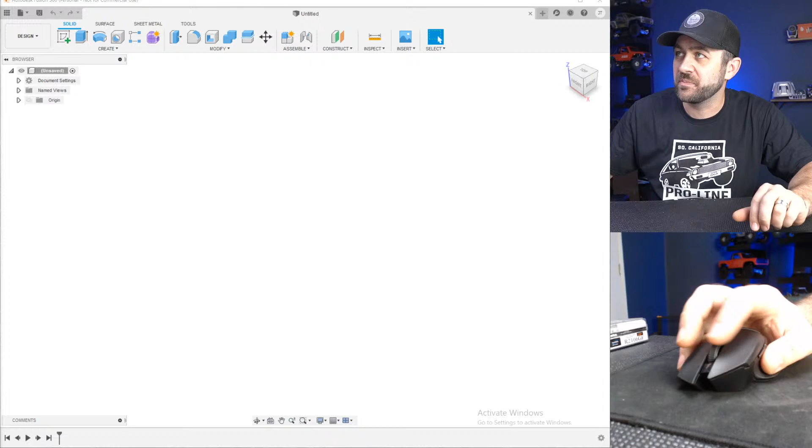Again, we're going to be using Fusion 360. I'm going to switch to that view now. I guess my other camera is just giving you a real good view of my shirt. This secondary camera is almost pointless, but it's just to fill dead space on the screen, so that's why you get that. Anyway, Fusion 360, the reason we use this is you can download it for free and get a free license for it. It's a little difficult to navigate your way there, they don't do a good job of putting it out there exactly how easy it is to get everything for free, but nonetheless it is possible, at least in the US.

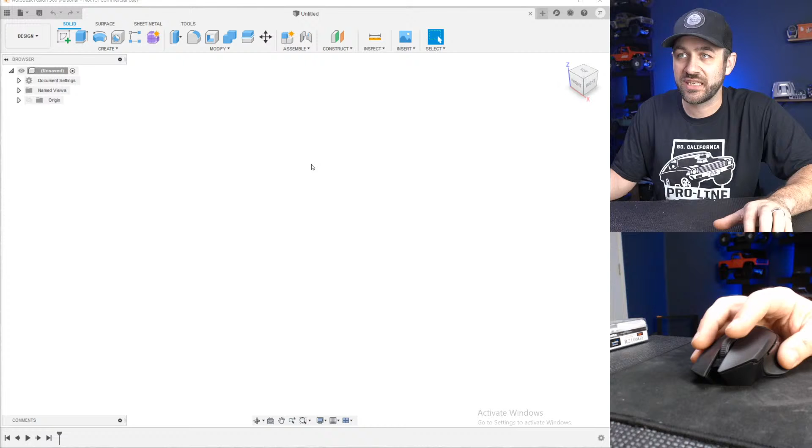So this is Fusion 360. Once you install it and open it up for the first time after registration or creating an account, this is what you'll see. We'll kind of go through general what you're seeing on screen before we jump into a very simple project tonight. Up at the top you'll see the typical menu bar, something you're probably used to seeing in most applications. The first thing here is the design menu, and if you drop that down there's a number of other areas, things that are more in-depth. Design is where you'll spend your time creating a new solid you've never done before. Generative design is taking and simulating forces, and it will create something on its own - kind of cool, but much more advanced.

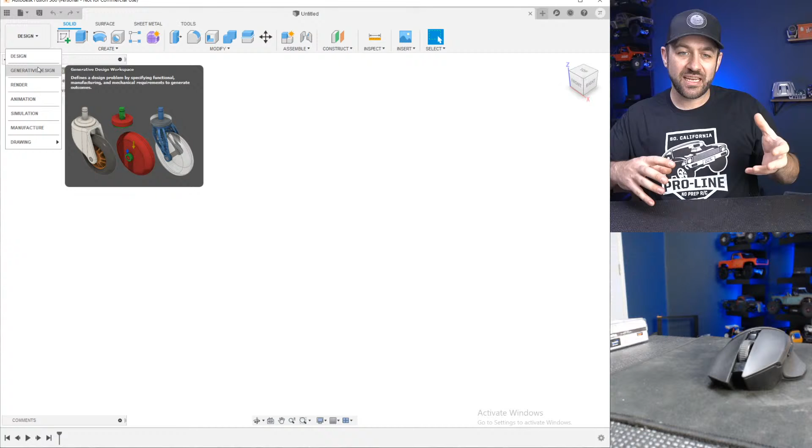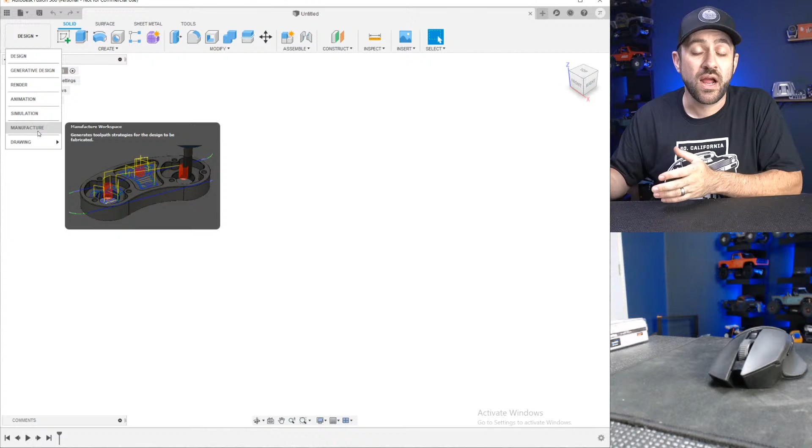Render takes a model you already have and tries to put photorealistic textures on it to make it look like a real picture. Animation is exactly like it sounds - you take something you've already drawn and animate motion of some sort. Simulation again is trying to add forces and it'll show you weak points, kind of cool, a bit further advanced. Manufacturing is used like when I draw something and then use the manufacturing tab to write tool paths to cut things out on my router, or they've also integrated some 3D printing slicing into it. Again, these are not things you'll normally need right away. Then drawing lets you take an object you made and make regular 2D drawings like you'd print out, adding dimensions and that type of thing. Again, design is where we'll spend our time, that's where you need to know most things.

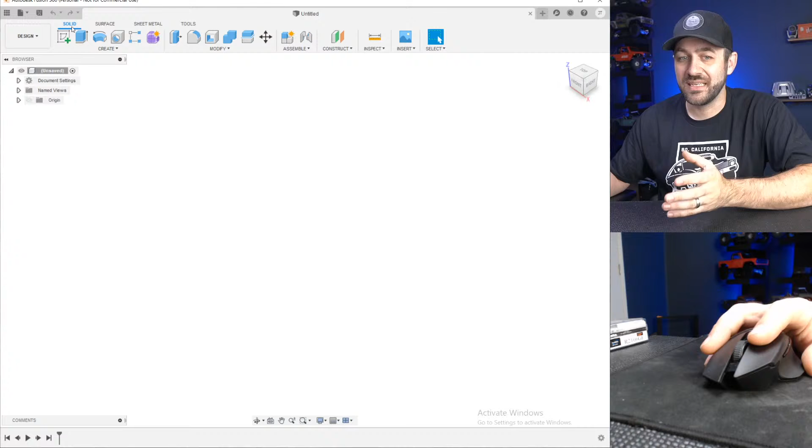Then across the top we've got a number of tools, we'll talk about those as we go through them. Above that you'll see Solid, Surface, Sheet Metal, and Tools - these depend on the type of item you're trying to make. Solid has most of what you need. Surface is like when you're trying to make more organic models and meshes, it's a little different. Sheet metal, like it sounds, has design tools focused on making things like a flat piece of sheet metal that might have bends, but it puts proper allowances in there so you can create that, hit a button, and it will lay out a flat pattern for you.

I find this very handy for certain instances and applications, but maybe put that in the back of your mind - down the road it'll be something you'll use. And then tools, actually this is where the 3D printing part lies. There's some other things where you can add checks for multi-part designs and more things we can discuss later on.

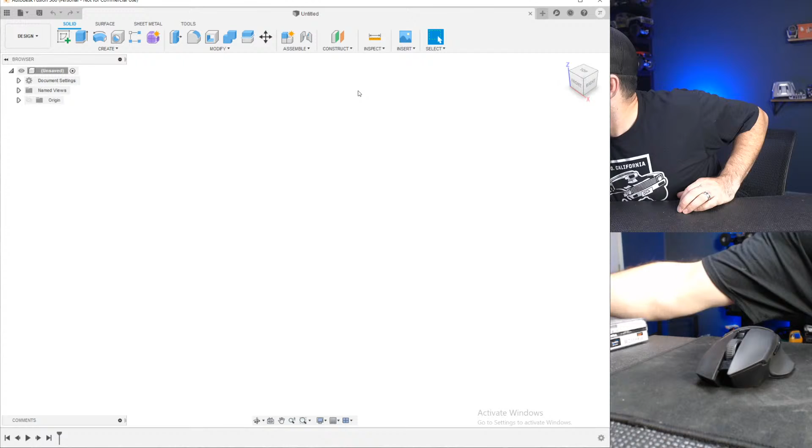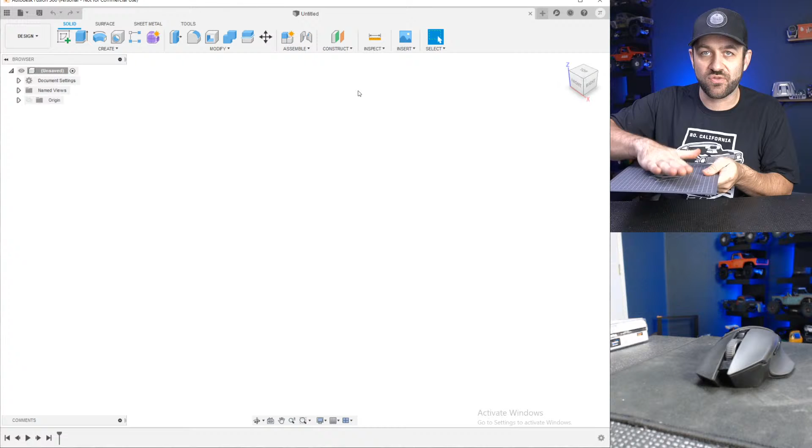Back to solid and back to our toolbars here. The one thing to think about with 3D printing is that everything is done on a plane. You can kind of think of a plane as like a sheet of paper. If we grab my 3D print bed surface, you can't draw anything in 3D - you can't just start in 3D. You have to start with some sort of shape in 2D and then try and add the other dimension. You can't just draw around - well, you kind of can in 3D sketching, but that's not the point. You need to start with something and then add a dimension to it. So as we get to things, we'll start here, then we might turn the plane, but just remember you're always trying to draw on some sort of plane.

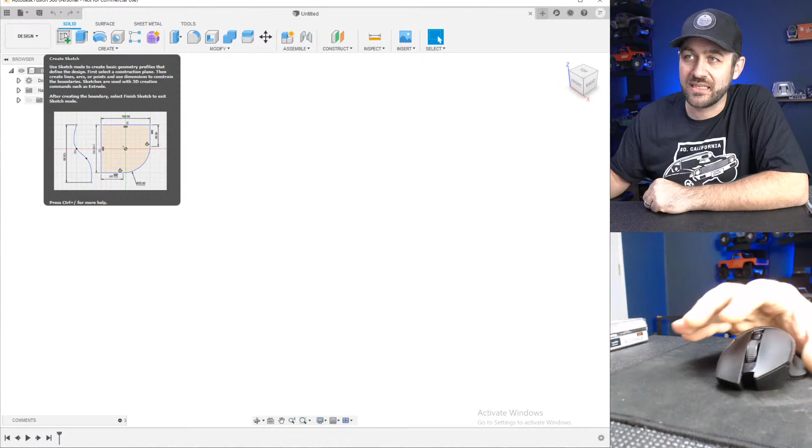So like I was saying, you need to start with some sort of drawing on some sort of plane. The very first thing you're going to do is go up to this top part and where it says create sketch - most things are based on sketches in Fusion 360. So we're going to go in there and click create sketch. Then you can see these 3 orange squares pop up.

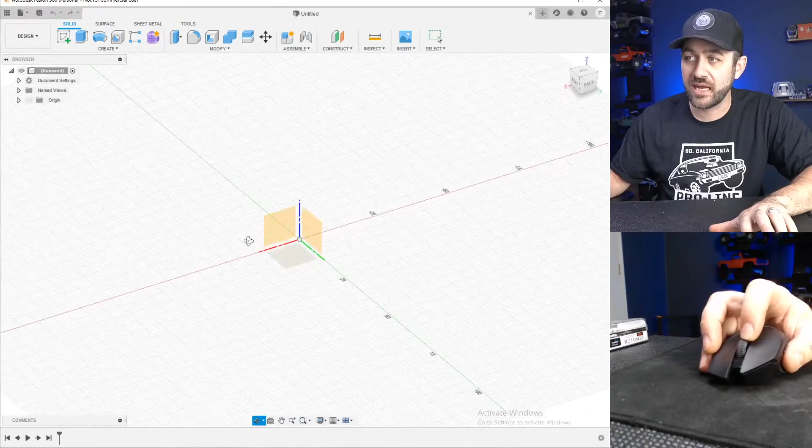Now, I highly suggest that you use a mouse with a center scroll wheel that you can click down. It's very powerful and will add a lot of functionality. When you have your center scroll wheel, you can zoom in and out by just rolling that mouse. The other thing you can do is hold Shift on your keyboard and then center click on that mouse, and that allows you to freely rotate. This is why I highly suggest a mouse - it changes everything. Otherwise, you have to come up here to this top right cube and drag it around to move organically, or click on a certain surface and it will rotate around so you can see how things move that way. But with a mouse and keyboard, you'll be much faster and much more fluent at things.

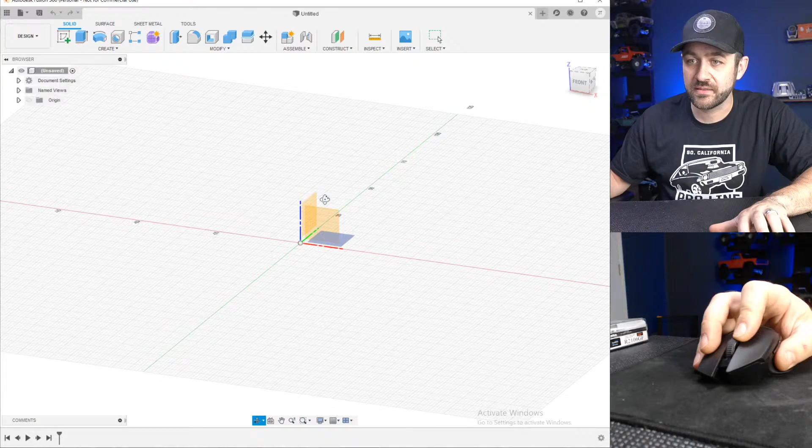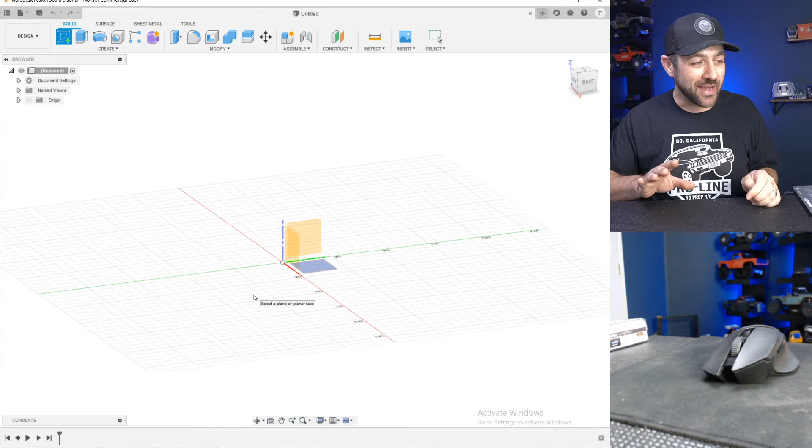So tonight I'm going to start with something that is very common in Scale RC trucks and very easy to do - a fuel cell. You'll see fuel cells in all kinds of scale things. There's no reason you should ever have to buy a 3D printed fuel cell for one of your vehicles, because basically all you have to draw is a box. So if anyone's trying to sell you a fuel cell, you can do it yourself. Buy yourself a 3D printer, buy yourself some spools of filament, learn how to draw a fuel cell, and then just sell them to your friends to pay for that 3D printer.

Like, you can get a couple hundred, $250 3D printer. You can print 10 fuel cells for people and then pay for your printer, and then you're done - you've got a new tool and you know how to do something. It should be high on your list. A 3D printer is a fantastic tool to have, especially if you've spent some time to learn CAD.

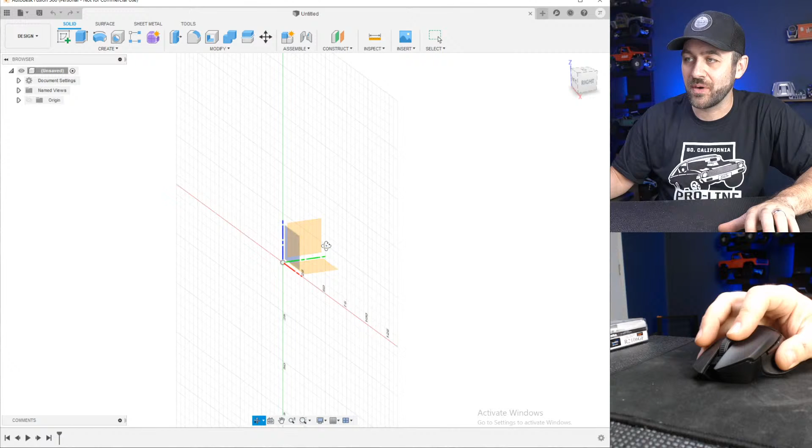So, like I said, we've got these 3 orange squares here. Now what we need to do is decide where we're going to start drawing. Now, a fuel cell is a box. And if you guys don't know what a fuel cell is, should I show you what I mean? I'm just Googling fuel cell, and it's funny - when you Google fuel cell, the first things that pop up are not RC fuel cells. So we're going to go to images.

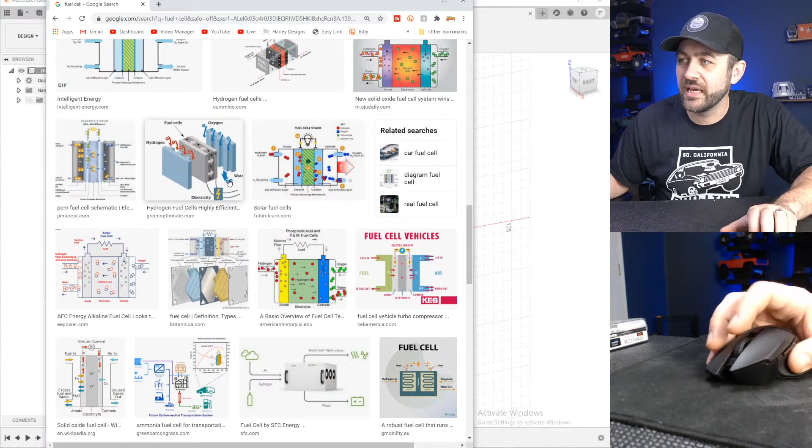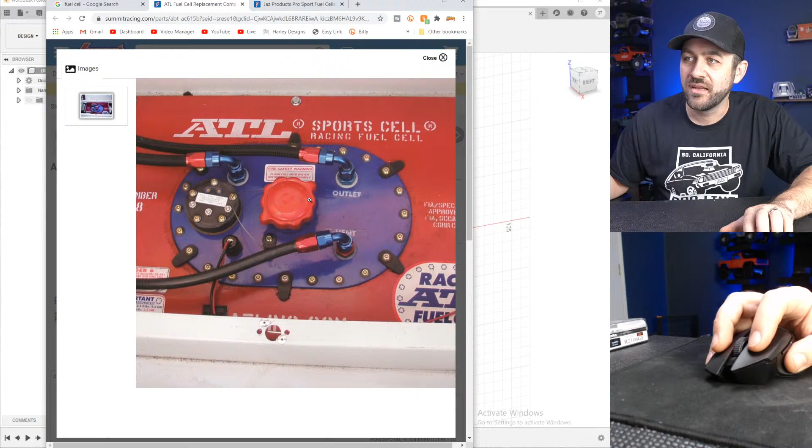And of course we get a bunch of - so here's a fuel cell. Actually, I saw one I liked better - an ATL fuel cell. So here's a fuel cell in a real vehicle. It's a metal box, it's bolted in, and then it's got a fuel pump tray or a cap on top, and that's where you've got your filler neck, your fuel pumps, your fuel lines coming out, return lines, everything there. So that is what we're going to create.

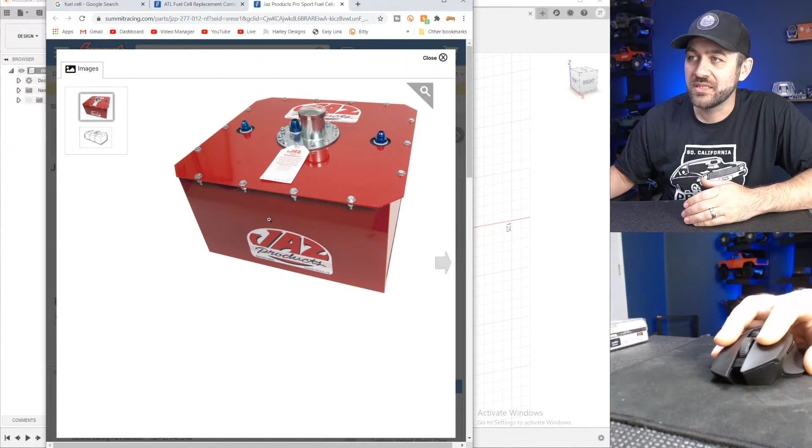Now, this is what a fuel cell can look like. They come in all different shapes and sizes, but this one here is generally what a fuel cell looks like when it's out of the vehicle. It's got depth, but in general it's a box. So pretty basic - nothing too crazy, right?

Everyone can get on board with that.

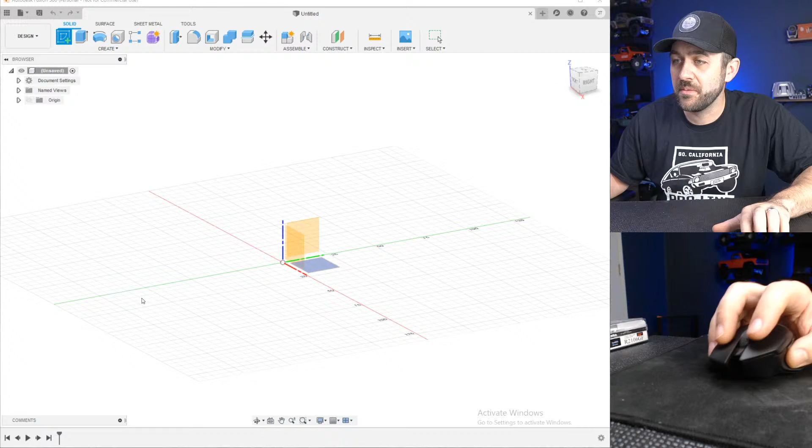I'm just moving my fuel cell images up. So what we're going to start with is these three squares: the bottom or top, either one. Then we have a left or right side, and a front or back side, however you want to call it. They call it top, front, and right, I believe.

We're going to select the top, so we're looking straight down if you can imagine that now. We've rotated automatically and we're looking straight down. Up at the top we've got our sketch tools now. Since we created a new sketch, it put us into the sketch menus.

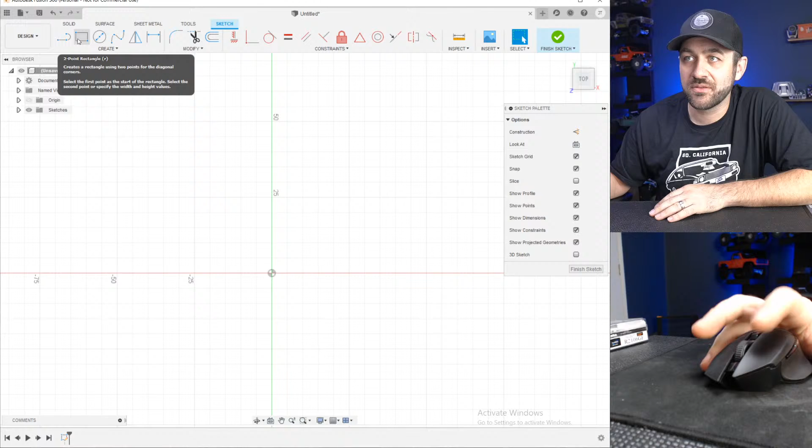Now up here we've got line, rectangle, and let's just start with those because those are the most basic things. You can draw yourself squares, you can draw yourself lines. So the fuel cell's a box. We're gonna start by selecting the rectangle and just draw a rectangle. Just draw anything, just start by drawing things.

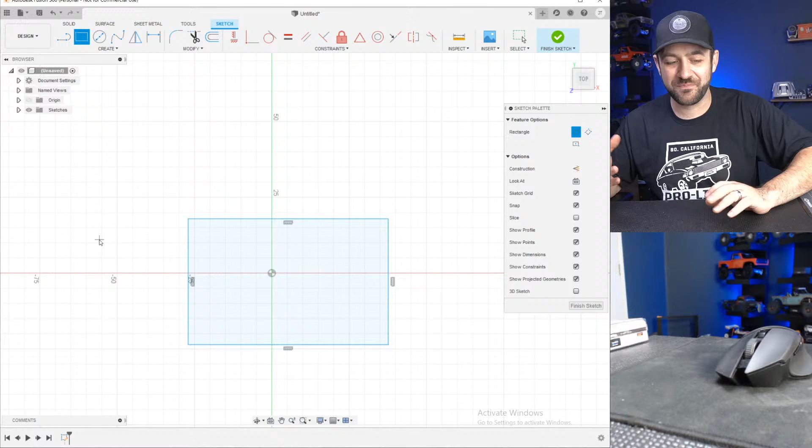That'll be best. Now I just hit escape. That's not necessarily something you have to do. I have a lot of force of habits, things that I've just done in drafting over 15 years, and I'm constantly just hitting escape. I kind of do it almost as a habit. I just constantly hit it way too many times. So if you hear me doing something like that, it's likely just my habit of mashing the escape key, and that's just to clear yourself from any tool selected.

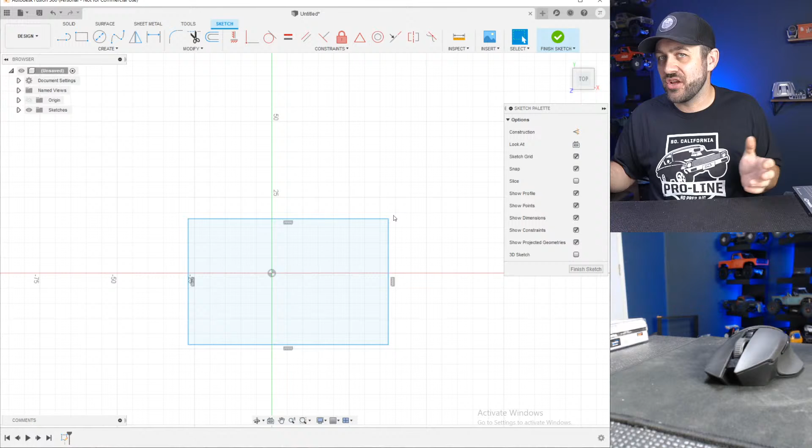But now we have a box. Now the box is all blue, like you can see, and when lines are blue, that means that they're not defined. It means that it doesn't actually know where they need to be. They can kind of be anywhere, so you could grab that line and move it and it'll do whatever you want. What we want to do, it's a good habit anyway, is to define everything, have things locked down. And when you do that, everything will turn black, and that's what you want. That's just good drafting practice.

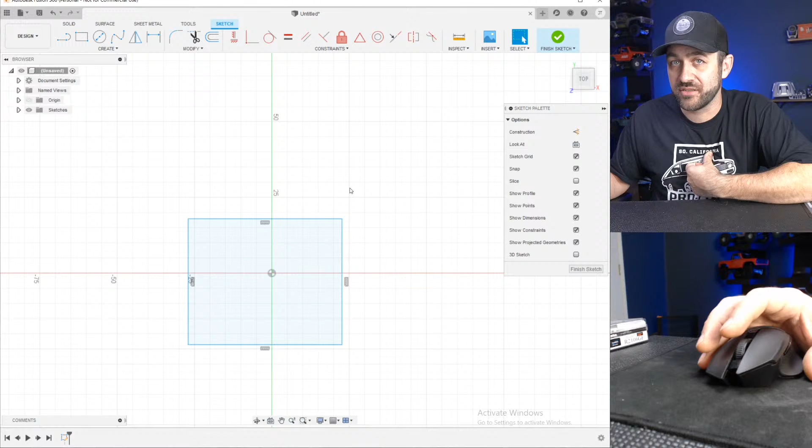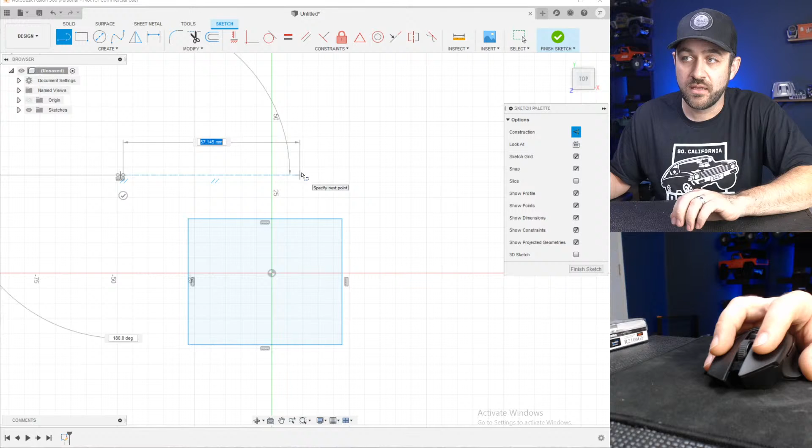Now there's a lot of different ways you can do that. I like to use something called construction lines. You can either come up here and hit line, and that will give you the ability to draw a line. Or I'm going to select that and delete it. You can hit L on your keyboard, L for line. Now over on the right, you can see in this menu there's something that says construction. You can select that, and now when you draw it's a dotted line called a construction line. Or you can hit L for line, and then X to toggle between construction on and off. You can see on the right side how it's going on and off, on and off. So L for line, X for construction.

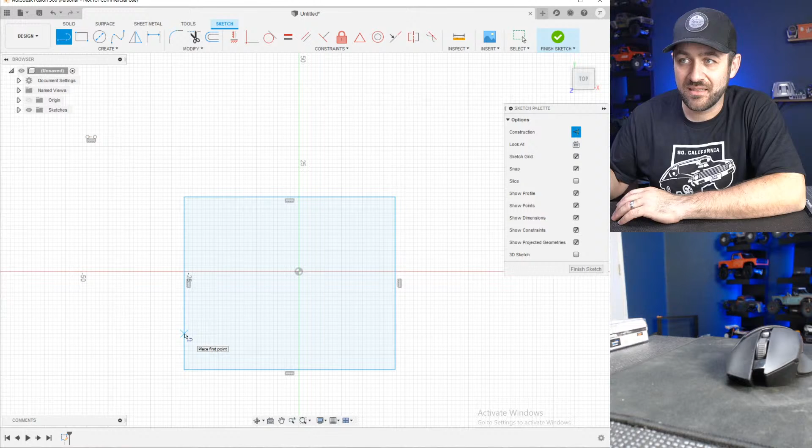Now the reason I like to do this is if you see this vertical line on the left, it's got a little X that's following your cursor. That is what's called a coincident mate, or a constraint, and that just means that if you start a line at that point, it will be locked to that line—not in one spot, but it's just locked on that line somewhere. So if you click on two places, now you have a line where the end point cannot be dragged off that line. Instead it will just move the whole line. That's called a constraint. That line is constrained slightly, not fully yet.

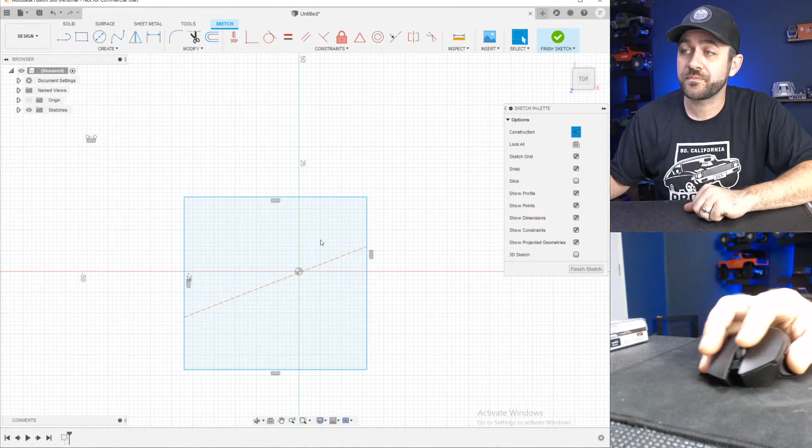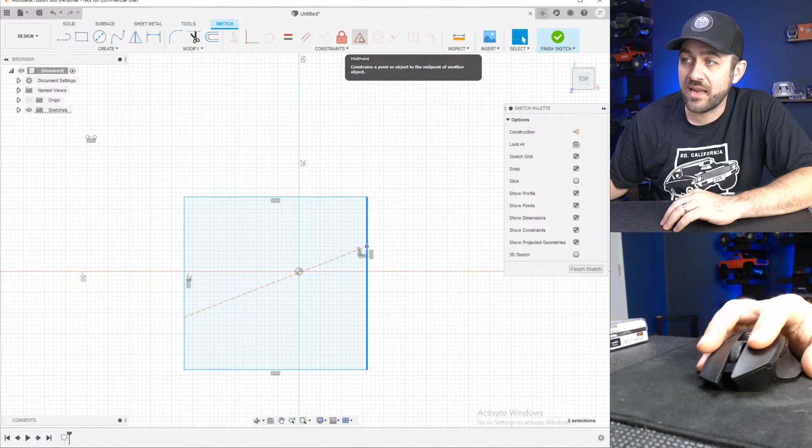What we can do though is select that dot, or the end point of the line, and then hit Control, which allows us to select multiple things at once. Now I've selected the end point of the line and that vertical line. Up at the top we've got these constraints along the top—this triangle means midpoint. So if I click that now, it moves everything so that the end point of the line is locked to the midpoint of that vertical line. We're going to do that to both sides right now: clicking there, clicking the other line while holding Control, then hitting midpoint. Now that line is locked to the midpoint of each side.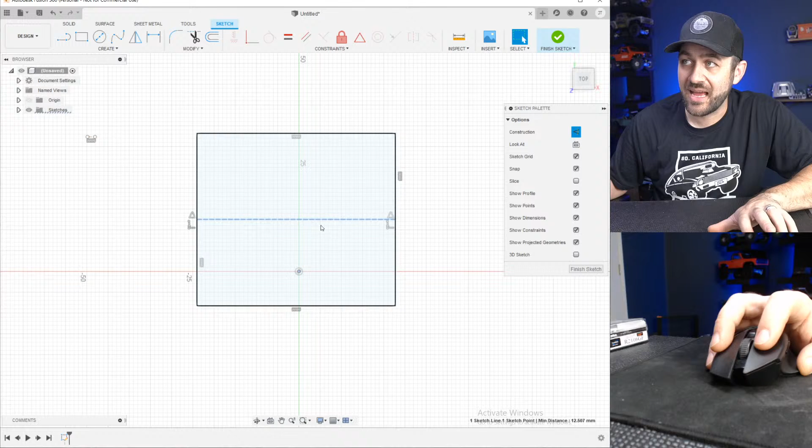Likewise, I'm going to select that construction line, hold Control, and select this point right in the middle of the screen, which is the origin. So I'm going to select that as well, and then again, midpoint. So now that construction line is locked to the midpoint of the origin, the midpoint of the line on the origin.

And that just means that now, as we move this, you can see how it moves much differently because that's just the nature of geometry. How things are constrained at this point, everything moves a little bit different.

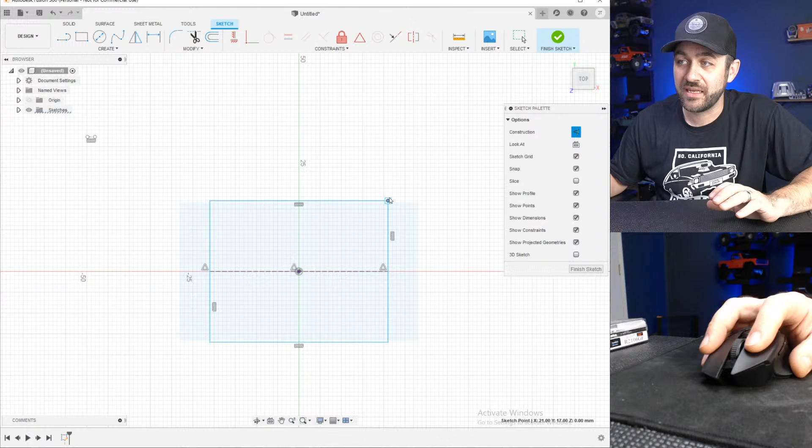What we need to do now is decide how big we're going to make this. We're not going to follow any design specifically, just make something in general, like a 2-inch by 3-inch fuel cell. But I like to work in metric, so Fusion comes standard working in metric.

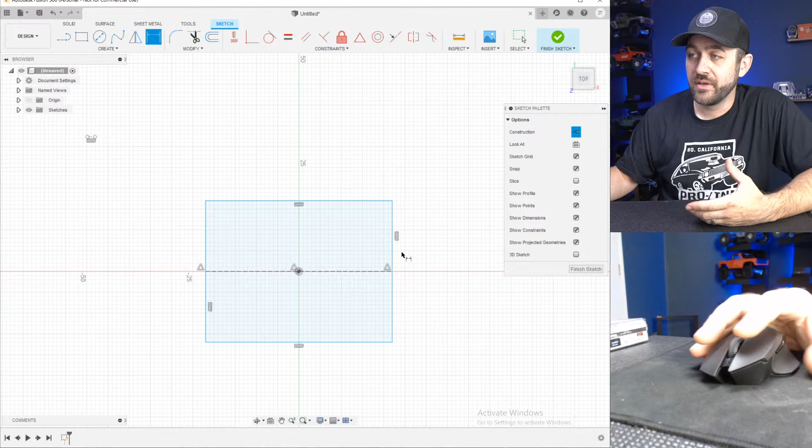If you hit the D key on your keyboard, it will highlight the dimension tool at the top. Oops, I am so sorry, I'm sure the comments have said that's been up the whole time. I really apologize.

If you hit the D key, the dimension key, the dimension at the top will say that's ready to go. Now you can come down here, select any line basically, then add a dimension. We're going to select this and go up—it just pulls it up out of the way. This doesn't really matter where you click it, it could be way up here or way down here, it doesn't matter. Just going to put it there.

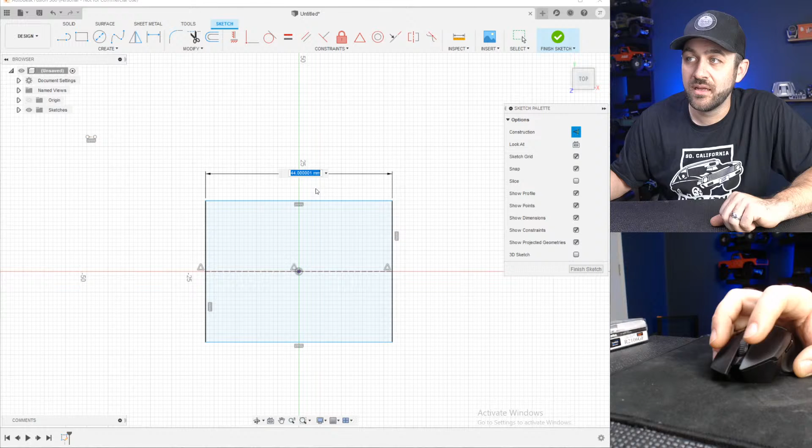And we're going to type 125 millimeters—wait, that's too much. 75 millimeters, that's about 3 inches. Now, if you don't like to work in millimeters, you can come up to the top right corner, select it, and go to Preferences.

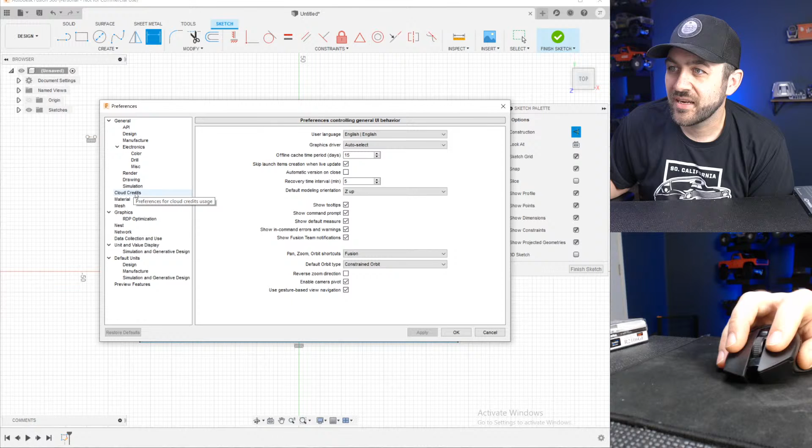It'll take a second. Let's see, where is it at? It is in... Cloud Credits, that doesn't seem right. Sorry, it's in here somewhere—Units and Value Display. This is where you can change it down here at the bottom. You can go down to inch, pound, PSI, and that will give you standard dimensions, inches, feet, things like that.

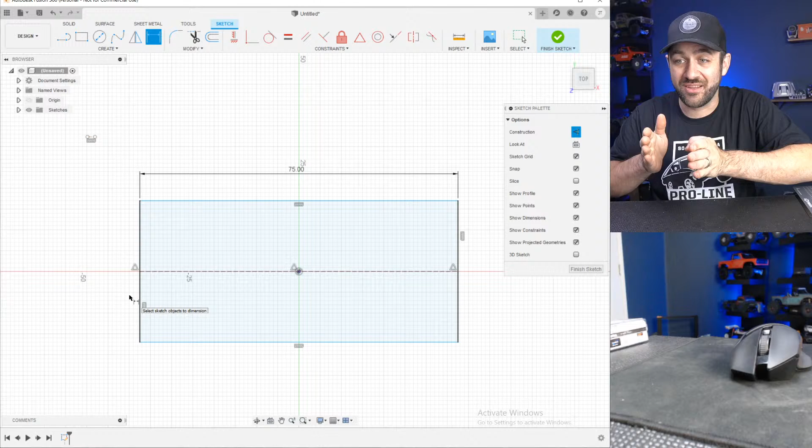But if you're doing this for RC, I highly suggest staying in metric, because you'll find that when you're measuring things, a lot of times they'll land much more on a perfect metric distance. So it's worth it if you're going to try designing around things.

We're going to use D for dimension again with that line selected, and add a 50 millimeter dimension line there. So now again, holding Shift and our center mouse button, we can push and hold, and now you can rotate around and see we have a 2D drawing in 3D space.

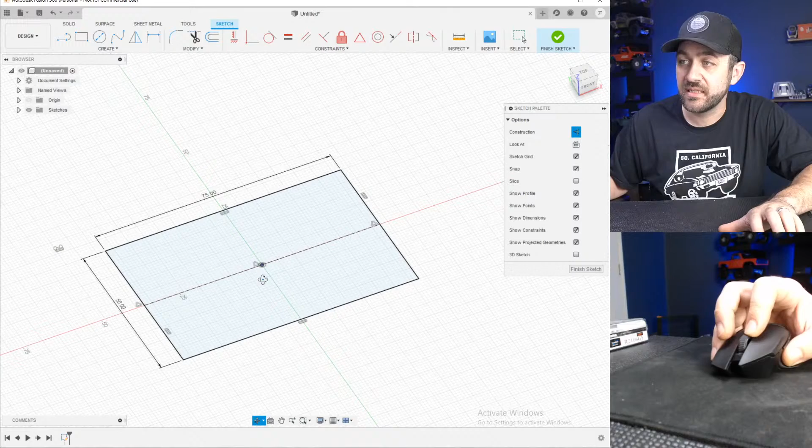But if this is all we want to put on this for now, just to keep it simple, we're going to go up to the top right and hit Finish Sketch. Now we just have a sketch, we're done drawing that. We're going to come up here on top and use the Extrude.

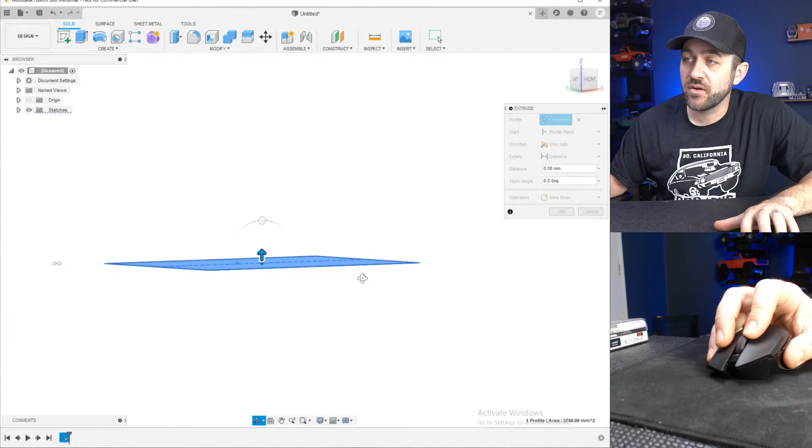Extrude is the most basic function and it's very simple. We have one profile in this, which means a closed shape that we can do something with, and it automatically highlights it for us. I'm just panning around now by holding Shift and rotating by holding down my center button.

But you can either grab this arrow and just drag, and now you can see you're creating that 3D shape, or in this little dialog box that's popped up in the center, you can just key in a dimension, like 25 millimeters, and hit Enter. And now you've made a box.

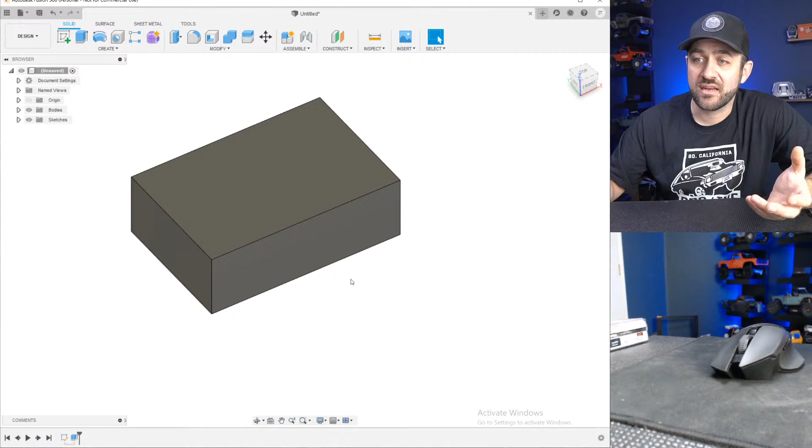It's just a box. But the nice thing is a fuel cell is kind of just a box. So you're about halfway to a fuel cell, right?

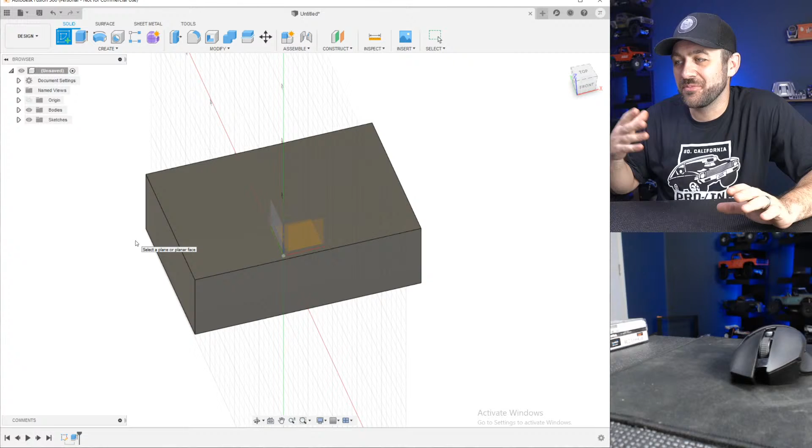So at this point, we just have to decide how much detail we want to put on something like this. Let's keep this, since I'm trying to go through much more step by step—I'm 18 minutes in and I've made a box.

So the next step is that we need to add the top part, the thing where the fuel filler cap and the fuel lines go in and all that. So again, we're going to go up to the top and hit Create Sketch.

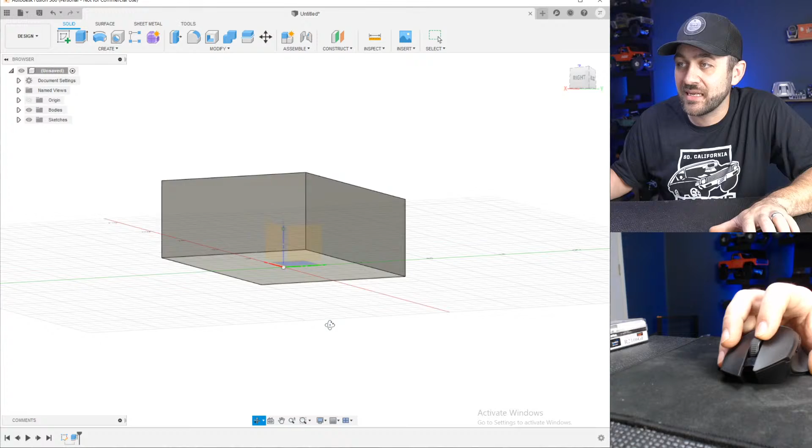Now, last time we selected the top plane, which you can see those 3 highlighted squares down there again. But that top plane is actually at the bottom of our fuel cell now, so that's not where we want to draw. We want to add these items to the top part of this, so we want to select the top of this box. You can kind of see how it puts that grid at the top. If I move to the side, it moves this grid around, trying to display where you're about to create a sketch plane, it's called.

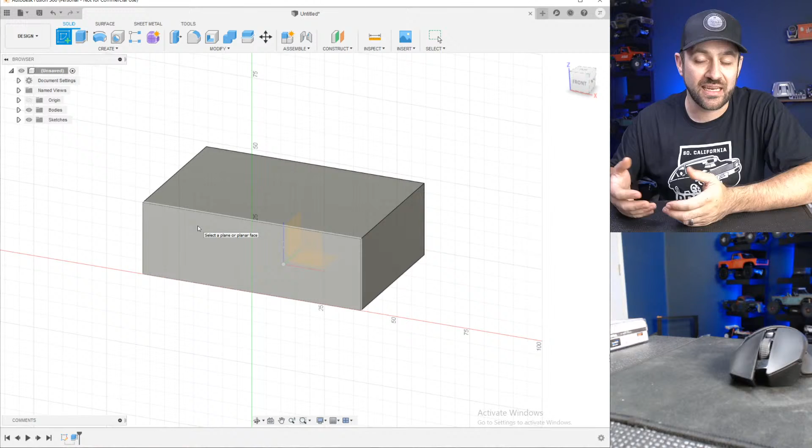Or you're trying to create, you tell it where to put that sheet of paper so you can draw on that. So we're going to select the top of this because that's what we want. And again, it automatically rotates to be looking straight down on it like you want.

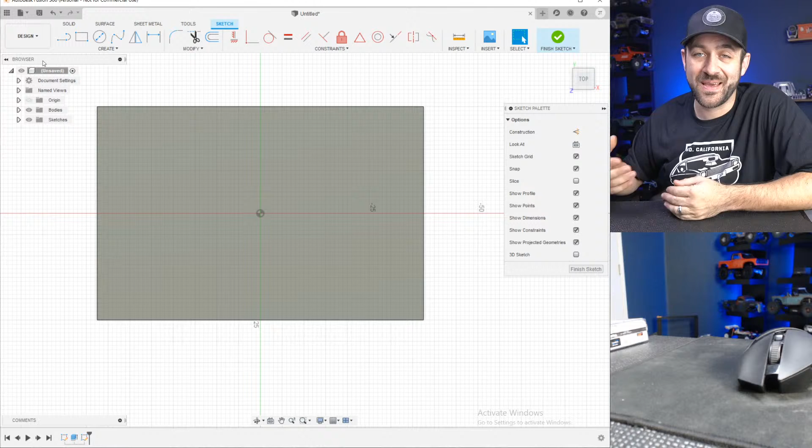Now, from this point, we need to draw the shape that we want. I have a fairly consistent way that I draw fuel cells. I've drawn a lot of fuel cells for a lot of builds, and I always make them fairly similar. It's just the style that I think is the most appropriate. Now you have certain tools up here, and we could use these tools to create this shape.

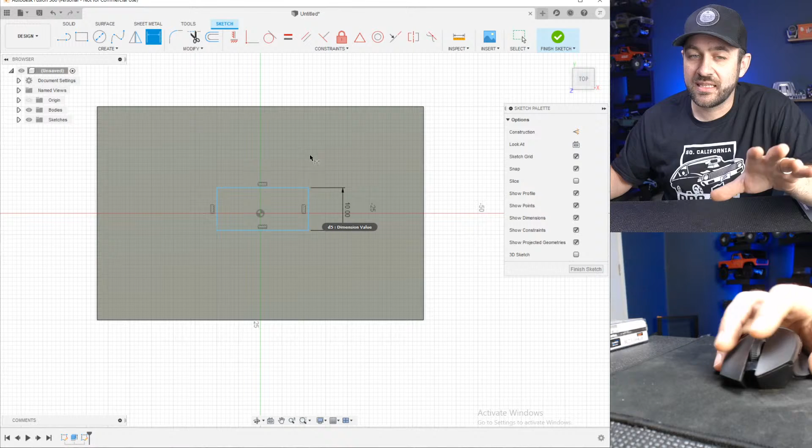Just for instance, I'm going to fly through one option. I grabbed a rectangle, and if I draw a rectangle, say I made this 10 millimeters. I'm not saying this is the way you should do it, so I'm going to go through an exact way. Now, to the right here, there's a fillet tool, which basically takes a sharp corner and puts radii in it.

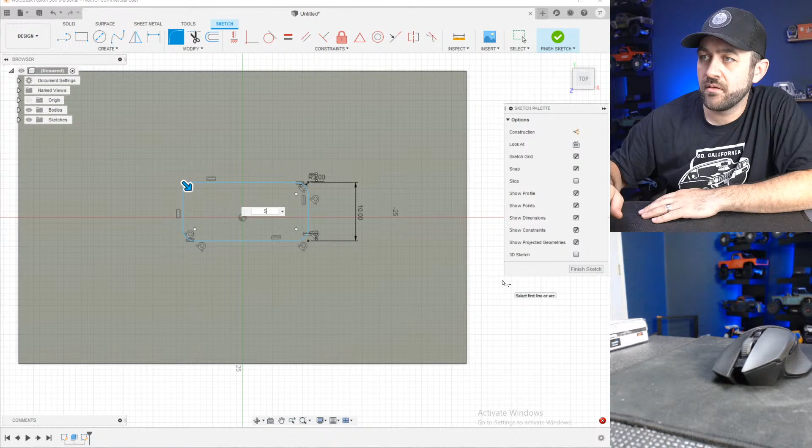So we selected that, and then I could select both of these lines, and then I could continue selecting all of the lines around this, and then I could do 5. So then it made... let's see, is it gonna let me? Oh, so it actually doesn't want to let me do 5mm radii because I only have 10mm total. So it would actually completely remove one side of the line. Like if I do 4.95, it will probably let me. And it didn't.

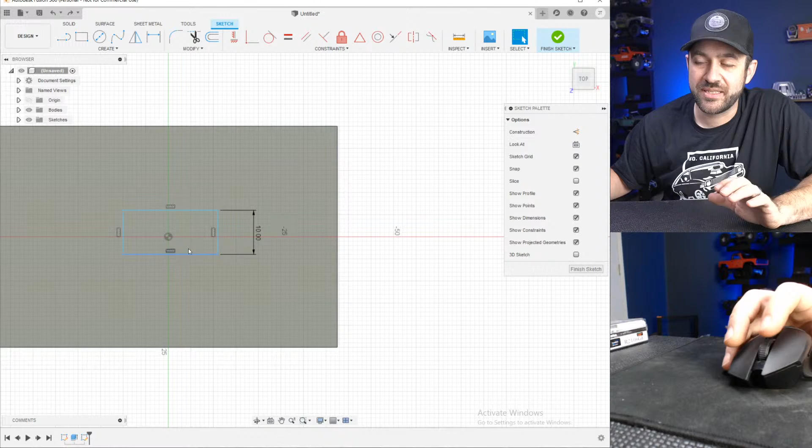Well, this isn't the way that I would tell you to do anyway, but we could go through that further. It's just sometimes there's little things. So if we drop down this create sketch menu at the top, there's more tools, more options.

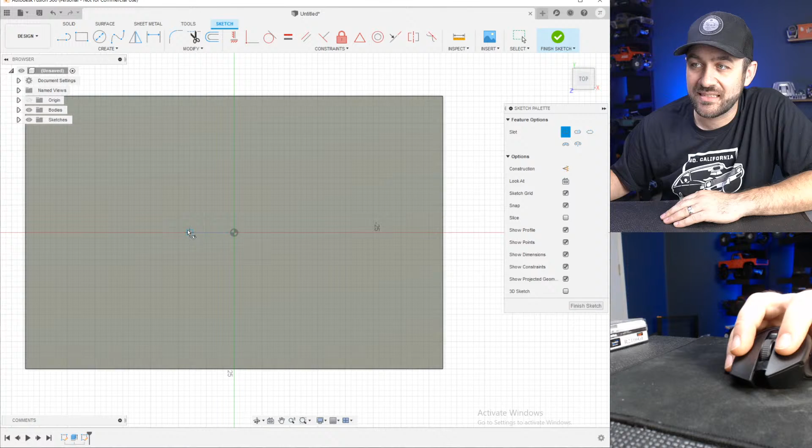The one that I like to use is called slot. So if you go to slot, then you go center to center slot. Now we're gonna draw a line based on this X axis here, but we're gonna click on one side of it and then we're gonna drag over, click on the other side, and then pull up. And you can see it creates that slot shape.

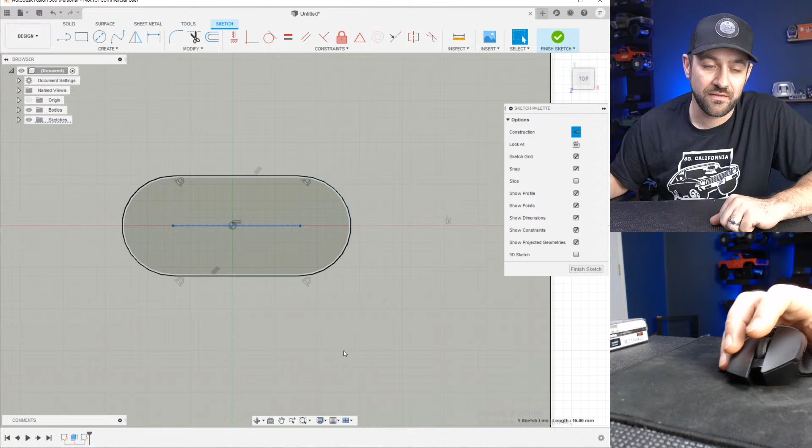Now, between those two center points, there is an automatic construction line created. If you hover your mouse over that, you can see it, and then you can select it if you like. We're going to select it. I'm going to hold Control, and then select the origin again. Then I'm going to go up to the top and use the midpoint constraint. And now that slot shape is locked to the center, and everything is defined a little bit better.

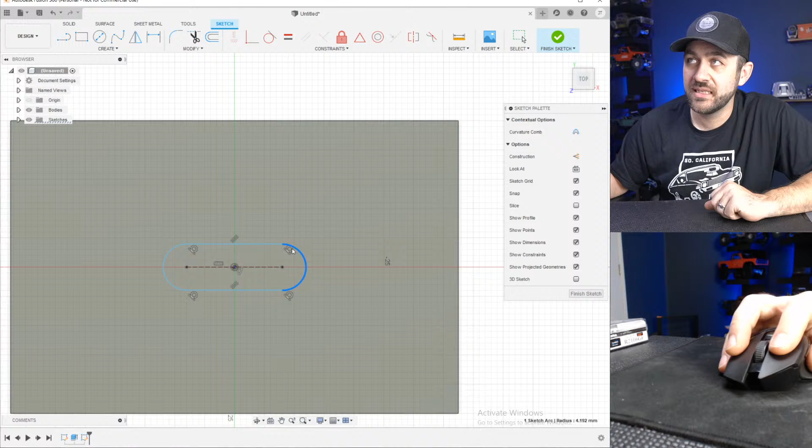Now, everything is still blue, you can tell. So we could actually grab those lines, and you can just keep dragging things around. We're going to hit D for dimension. Since we already had that line selected, we're just going to add a dimension to that. And we're going to say 6 millimeters, which that's a radius. So this is actually 12 millimeters tall through the center there.

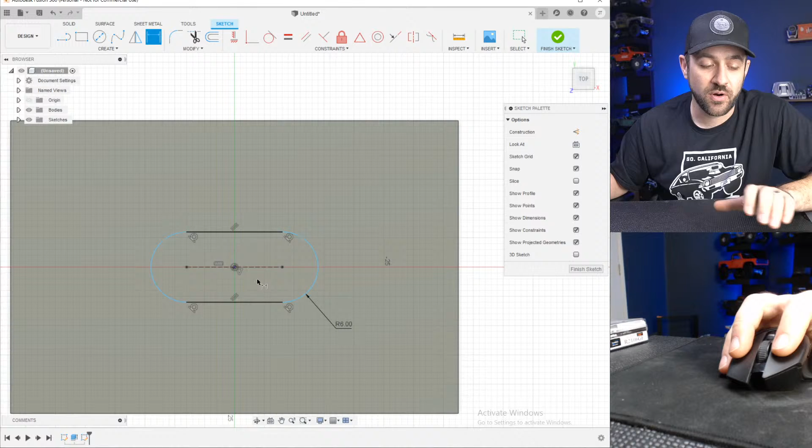Now, we need to define how far apart these endpoints are, because right now you can see that these two lines are black, meaning it knows how tall they have to be, but the endpoint lines are still blue. That's because we haven't told it how long it needs to be. We're going to hit D for dimension again, select that.

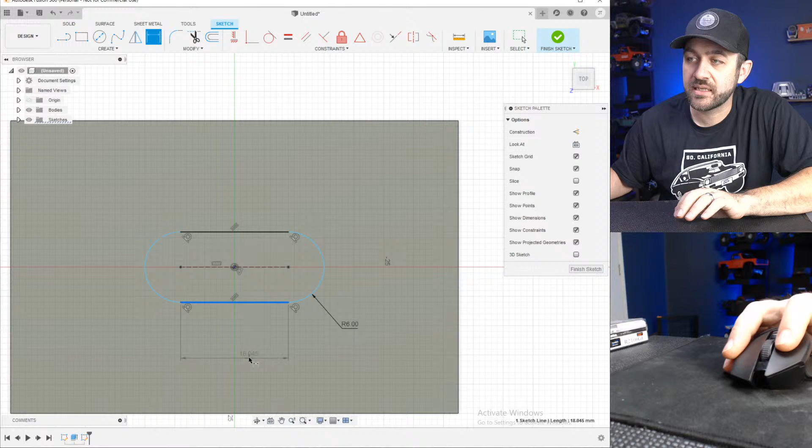I had 2 lines selected. D for dimension again, selecting one of them and dragging down. And we're going to make this, let's just say 12, like that. Actually, I want to make this a little bit bigger than 6. I'm going to crank that up to 8.

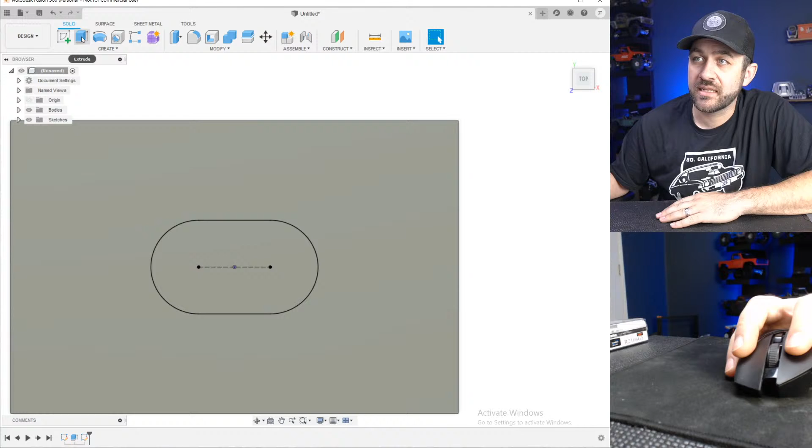So now we've drawn that simple shape. We're going to hit Finish Sketch. We're going to go back up and select Extrude again. We're going to select that piece, or that profile. I like to rotate down so that I can kind of see what I'm doing. I just like to do that.

And now, if you'd like, you could just click and drag that up. But for me, I think about 1 millimeter is fine. We're going to hit Enter.

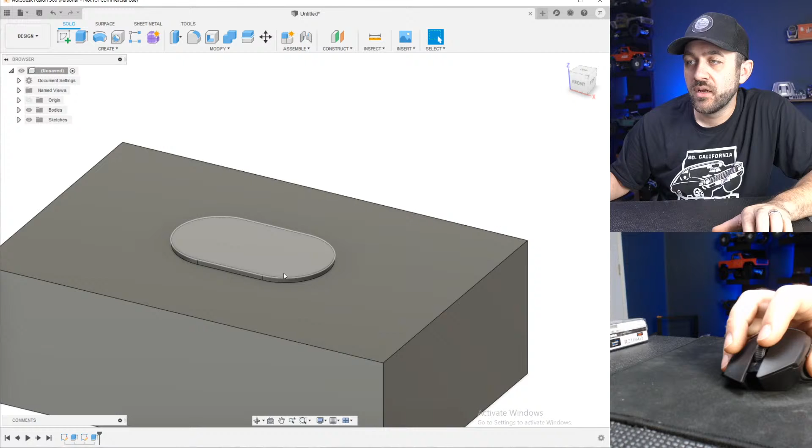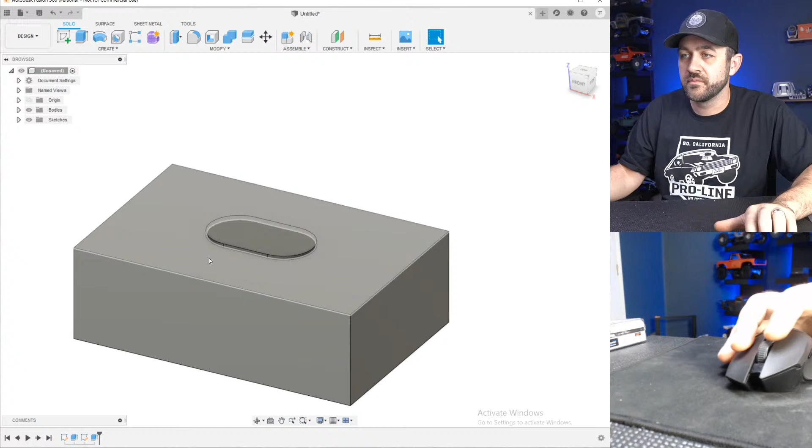Now, right now I've got this all done in one body. And for today, we're not really going to get further into bodies and things like that. We're just going to look at this design as if you're printing one item. So whatever you're drawing here would be one piece you would 3D print entirely. It's not going to be a hollow box or an empty box or anything like that. It's just going to be what it is. So we've done that part.

Now let's add the filler cap, for instance. Oh, is my mic— my audio is crackling.